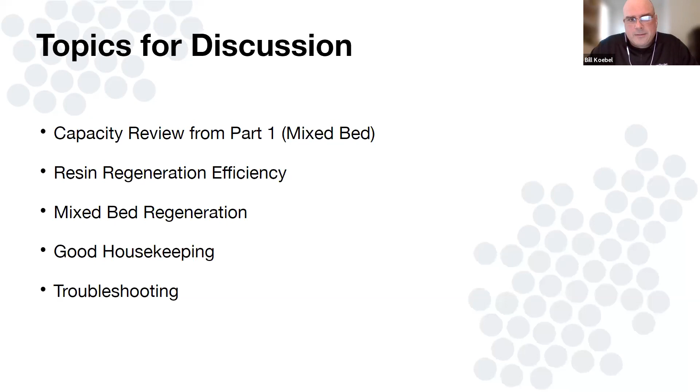So topics for today, we're going to kind of pick up where we left off in part 1. If you haven't seen part 1, I know that link is out there, or you can email us and we can send it to you so you can watch it. It's about an hour presentation and then an hour of question and answer, but I'm going to be picking off where we left off. We're going to dive right into regeneration efficiency. It's going to seem a little out of sequence, but I think it's good to talk about in the flow that I do. We'll get into the regen and then talk a little bit about good housekeeping and troubleshooting towards the end.

So today's resin topic, we're going to be focusing on the mix bed, which is, at least the ResinTech mix bed, a combination of that dark black cation resin, which is a strong acid cation resin, with our typical strong base anion resin. And again, strong, that is this light color, and that's where we get this salt and pepper in the end. We like the black cation resin because, as we'll discuss, it helps you see separation, so it makes regenerations I think a little bit easier. Also, our new plant in Camden, which is gearing up as we speak to make cation resin, is also going to be making this dark colored material. So black cation is kind of our thing, and it has a purpose.

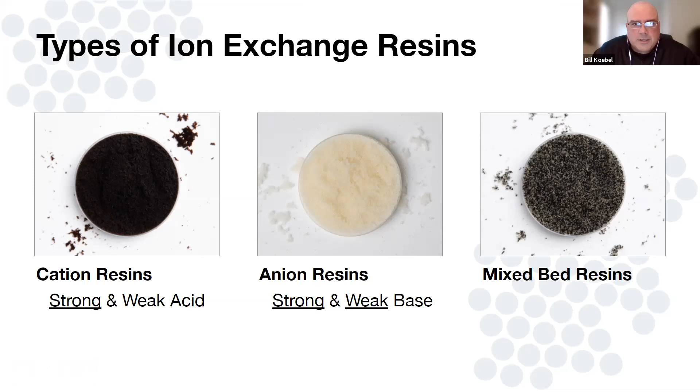All right, so let's pick up where we left off.

So if you guys didn't see the first one, this is going to seem foreign, but we talked a little bit about mixed bed exhaustion before. If you see my pointer here, typical mixed beds will rinse up to a high quality, and then slowly come down. Maybe not that slow, but you'll see a quality break where it'll eventually die out and have no capacity.

But when we talk about capacity of a mixed bed, knowing your endpoint is very important. So if we're going to take our tanks offline at a high quality, in this chart it says 16 megs, but it could be 18, then we're going to be limited to capacity ranges down here, and this is in grains on the x-axis. 5,000-6,000 maybe. And if you're cutting it off at, say, a mega ohm or 2, which is relatively low quality for a mixed bed, you're going to get much longer throughputs - kind of 8,000-9,000 grains.

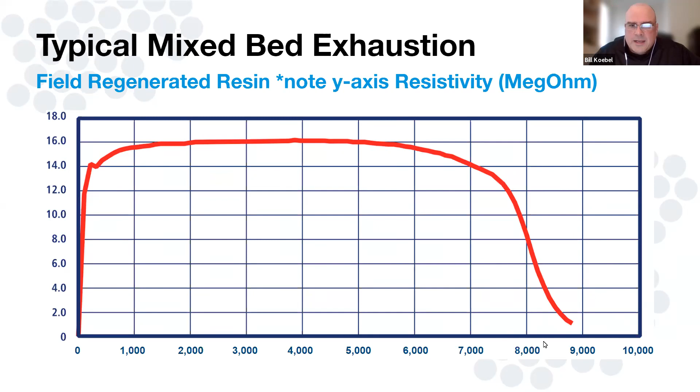But if you're going to cut it off at, say, 10 mega ohm or a relatively high quality, you're only going to get about half that. That's what I wanted to drive home first, is that where you end your mixed bed will dictate the throughput. So we can't apply a high capacity if you're going to be cutting it off at a very high quality throughput endpoint. Keep that in mind.

Then from the calculator, we also talked a lot last presentation about carbon dioxide. Carbon dioxide is present in all waters, at very low levels, but relative to TDS. But once you put it through an RO system, for example, those CO2 dissolved in water will pass right through the membrane. So even though your water quality, say your TDS out of an RO is maybe 1 ppm, the varying levels of CO2 are going to have a very dramatic impact on your throughputs. And it can vary - there's no set number.

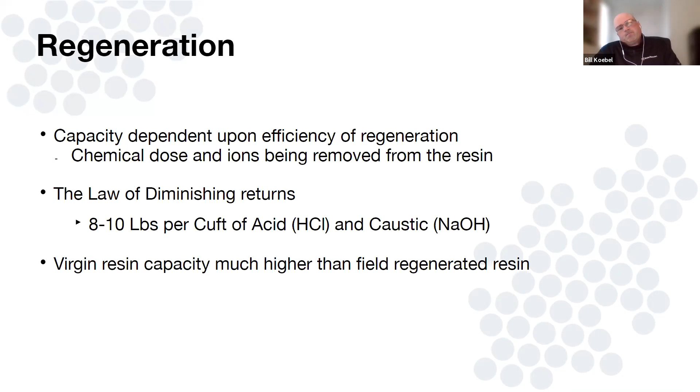When we talk about regen, the capacity will really come down to obviously how much chemical you throw at it, but it also matters what's on the resin itself. So it's not just how much, it's what's on it already. In our world of field regeneration, portable exchange DI, there is a law of diminishing returns, meaning how high of a dose can I go to get the best bang for my buck so that I'm maximizing as much capacity as I can from a cost perspective without going overboard and wasting money, but not using too little that I'm not getting the throughputs my customers are accustomed to, whether from my business or a competitor I'm trying to replace. So in the end, it's a balancing act.

Let's go through this. I'm going to throw a bunch of charts at you guys. They're all going to look the same. The y-axis is really discussing the percent conversion or percent regeneration, not really in grains numbers. We're going to look at this as, is it 60, 70, 80, 90% regenerated? The x-axis is always going to be in chemical pounds per cubic foot, and we're really going to be talking in this 8 to 10 pound range. This is kind of the wheelhouse, as I call it, of efficiency in terms of field regeneration, where you're giving it a good enough kick that you're getting the best regeneration you really can, versus too low where we're on the downside of some of these curves, where for an extra pound you can get a lot more. This range is kind of where it levels off.

The tricky part about sulfuric is that calcium sulfate is very insoluble. It only takes a couple thousand ppm for it to precipitate out of solution, and that can happen in and around the resin bead itself. So if you have hardness bearing water and you're using DI resin that is removing it, and you go to regenerate it, and if you happen to overdose the sulfuric acid too soon, you basically foul the cation resin with calcium sulfate. If you've ever dealt with it, it's not something easily fixed. You can't just rinse it out. You can't just soak it in hydrochloric acid and it goes away. For all intents and purposes, that resin is done and you're just going to move on from it, meaning throw it away and replace it.

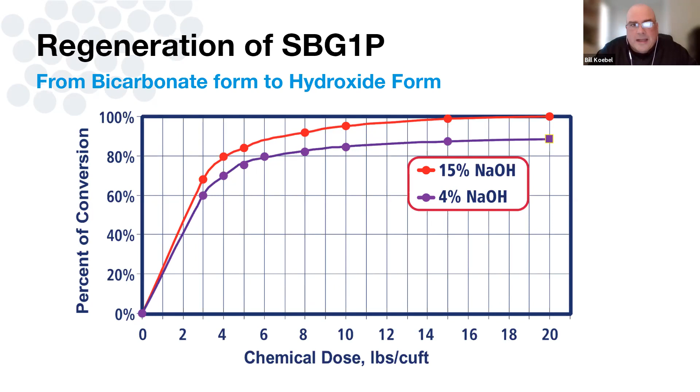The typical regen we see from a field resin is roughly in that 60 to 70% range. A lot of times that has to do with whether they're using brine to separate or not, which I'll talk about a little later. But that is normal—if you see 60%, 65% conversion of your anion resin, that's normal. And that's because of this combination of anions that can be on the resin itself. Again, if we're using brine to separate, you're going to be putting a lot of chlorides on it.

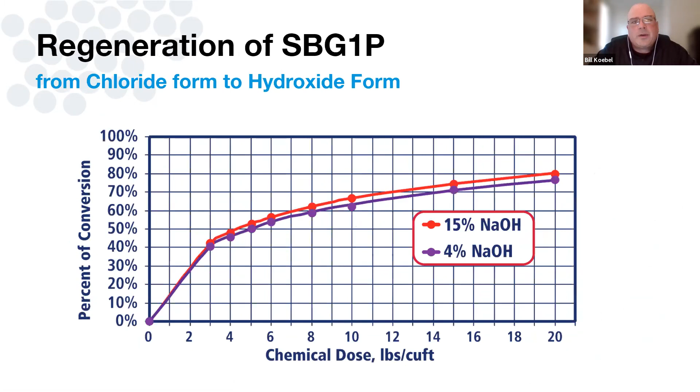That's the reason behind it. So as we talked about, the resin capacity, what you recover, is really a function of what was left on it. In terms of what we're concerned about in the field coming off the resin, as we talked about last time, sodium leakage is our primary concern when it comes to cation resin.

If you're having sodium leakage problems or poor rinse up issues, a lot of times it can be traced back to the sodium leakage. So that's an indicator something went wrong in the regen, or something was in there that shouldn't have been.

On the anion side, and I'm not really harping on it too much today, but silica is the first thing that usually leaks off an anion resin. Things like sulfate and chloride don't really leak off. They're not really going to cause you poor quality issues, it's more of a capacity problem. But you get into the lower held anions, and silica is the first guy to come off.

So if your customer has a silica spec, you can still be making water quality, but you could still have silica coming through. The next ion that tends to come off is really the bicarbonate, but kind of has CO2 to a degree. That can leak off, but that's usually right at an endpoint of the other things pushing it off. The first thing you're really going to notice is silica.

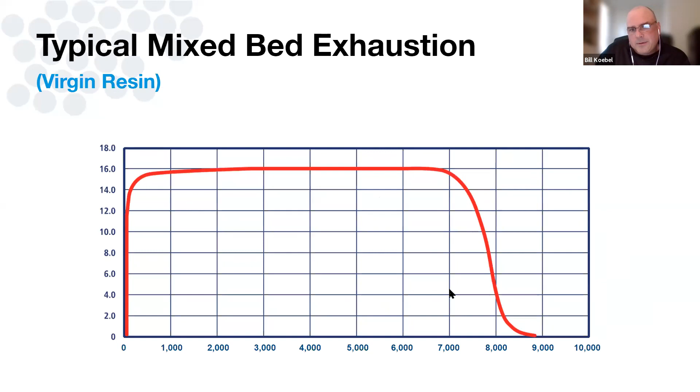As we talked about earlier, field regeneration is not like that. You'll rinse up maybe a little bit slower, but then once it starts coming down, it takes a little bit longer. There's a lot of capacity there that you gain with virgin that you kind of lose with regenerated. So if you have a finicky customer that wants to hold the highest water quality for the highest period of time, if they're not happy with what your regenerated resin does, or what you can do with tanks in series, virgin resin tends to solve that problem.

Crashing a lot of times comes from something that went wrong in the regeneration process, whether it be poor separation, poor regens, or maybe something happened in the mix.

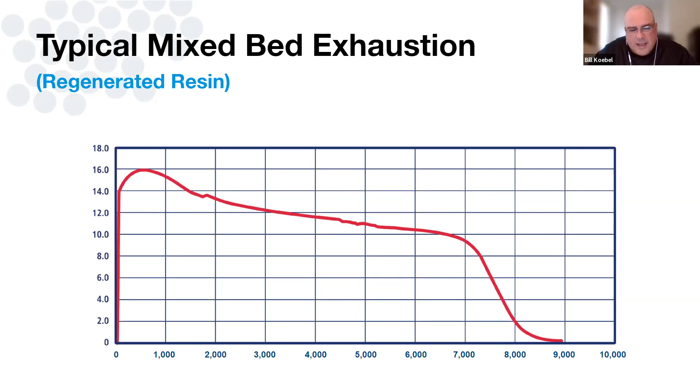As we get into the mixed bed regen portion here, every single step has a purpose. As much science as there is behind all of this, there is some art that has to be taken into account. Not every batch of mixed bed is going to behave the same way, or do exactly what you want.

That makes it challenging, I think, in a portable exchange service DI environment, because really your end goal is to make a consistent product. You want to make the best water quality for as long a period of time as you can for your customer. But you've got to make your process as easy as possible to repeat over and over again. And I think that really all starts with paying attention to the details.

I'm hoping to go over some of those details today that maybe some of us have forgotten over time, or maybe aren't implementing today—just some simple things that might help you improve your product. At the end of the day, this is your product you're putting into the field. Let's see if we can help improve it or solve some problems for you.

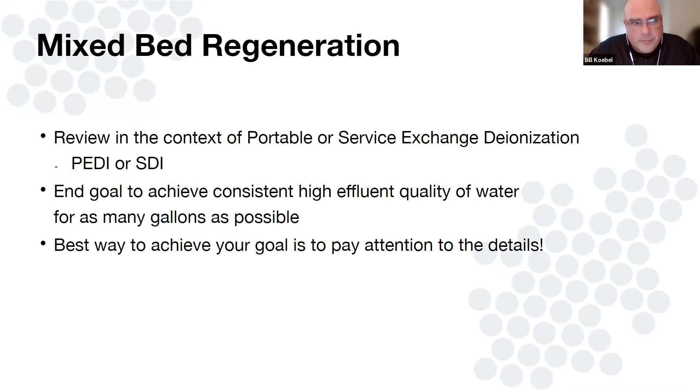So here is our typical regeneration setup. This is a classic Ecodyne style regen plant. Whether you have an Ecodyne plant or one that was custom built, they're all going to look pretty similar here. You have a separator column, usually very tall, to separate the resins from one another. Then regen vessels, one for cation, one for anion.

I don't know if you can see this, but the anion vessel is here—it's a little bit bigger than the cation vessel. Sometimes you might have multiple regenerators, maybe four tanks, for staging or doing different regenerations at different times. And then in the end, there's always a mixer.

Now there are smaller plants, what we call funnel plants, and I didn't quite have a good picture of that, so I didn't include it here. But a funnel plant is basically a single tank separator that you then regenerate inside the service exchange vessels on your own, and then put the resin back into the funnel to mix.

So it's basically the same process here, just not broken up into big tanks. So even if you don't have a plant like this, and you just have a funnel plant, everything we're about to talk about is going to apply—it just applies a little bit differently because of your system.

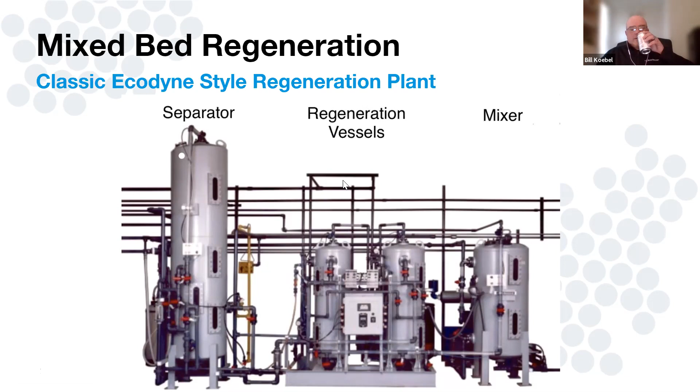In terms of regenerating mixed bed, the sequence really isn't any different than what you would do for a water softener, for example, or anything in-place regenerable in the field. You still need to backwash, and in the case of a mixed bed, the purpose of the backwash is also separation.

You're going to be adding chemical, then rinsing it out with a slow and a fast rinse. And then in the case of mixed bed, we've got to remix it into the vessels and put it into service. So the sequence isn't anything really different than what you would do for any other unit.

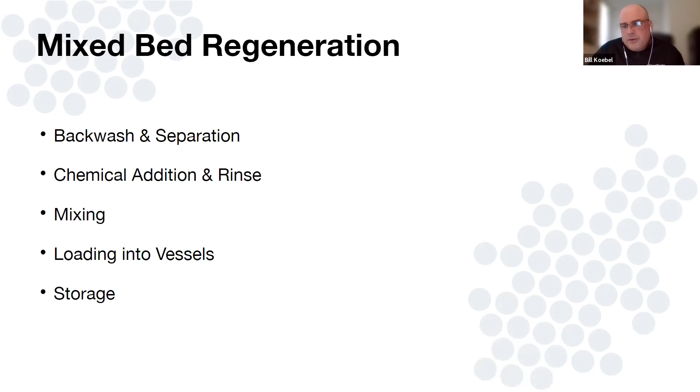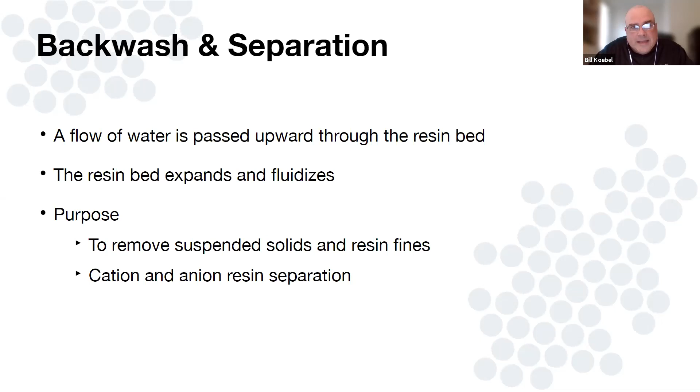So backwash, basically lifting the resin up—the purpose of it is to remove any suspended solids, any resin fines that might be in the vessels, but also we've got to get that cation and anion resin to separate.

So in a perfect, ideal resin separation world, the cation resin, which is the dark resin, always goes to the bottom, and the anion resin sits on top. In a perfect world, you can see a perfect line every single time.

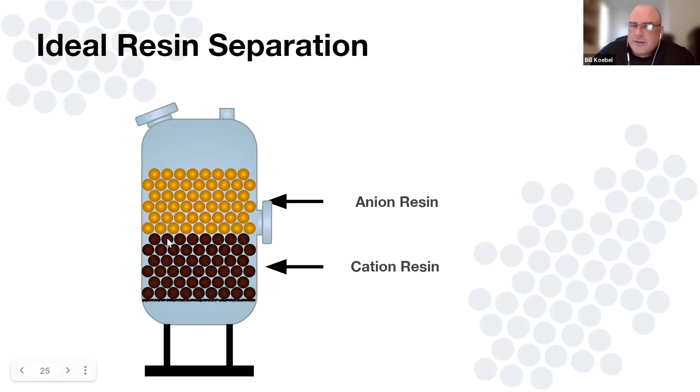Well, it doesn't always work like that, right? A lot of times there is what we call an interface or an intermix layer that can occur. And this just happens because beads stick together.

There's a reason why you get an intermix layer. Cation resin is denser, so it wants to fall. Anion resin is lighter, and it wants to go to the top from a density perspective.

The resins in mixed beds today are really designed to separate, but sometimes we get this stuck-in-the-middle situation. We've got to try to break that up and get it as separated as we can. Ideally we want this layer never to be more than, call it, 3 to 6 inches. If you're getting into like a foot of intermix layer, we want to try to make it smaller and smaller, because that's where it throws off the balance of your regeneration.

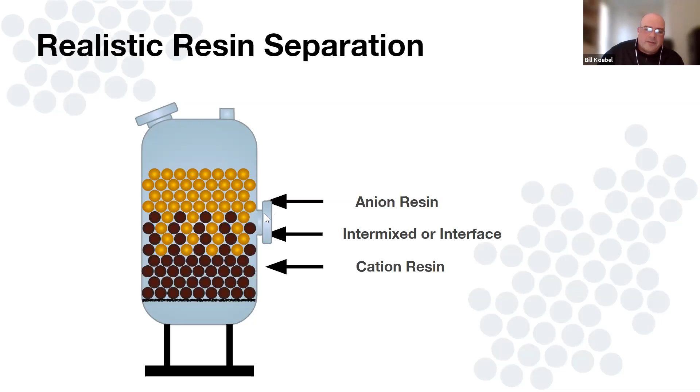In terms of what can hurt us when we try to separate, we're looking at a few things. The first thing is your separator is designed for a certain volume of resin, meaning it's designed for 20 cubic feet, you want to put 20 cubic feet in there. It's really designed for 100% expansion. If we try to jam twice as much resin into a column designed for say 20 cubic feet, you're only going to get it so far. So you tend to leave a larger intermix or you don't get as good of a separation. So really the first thing you need to do is don't overload your separator.

Keep it consistent. Resins themselves like to stick to one another. In fact, the cleaner the resin, the more it likes to stick to one another. This has to do a lot of times with a couple of things. One, when the resins are still in their hydrogen and hydroxide form, they create a lot of static charge, and those static charges are opposite given the opposite resins. So this tends to make the resin stick together in your separator.

So how do we manage that? If your resin is still in the hydrogen hydroxide form coming back from your client, the easiest thing to do is get rid of that capacity. A simple thing you could do is hook it up to your own water supply or an RO system and feed your DI water storage tank, use it as makeup water. Another thing you can do is kill it, which we'll talk about, brine kill, here at the end. But getting it out of those forms is very important.

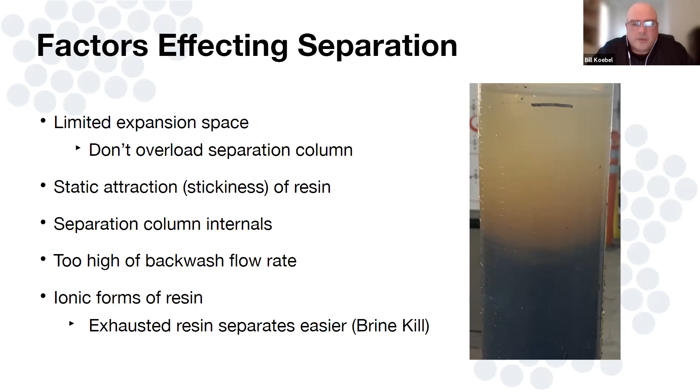But if you have a high level of hydroxide or hydrogen left on the resin, that can actually work against you a little bit, and you can damage the resin over time. That's not uncommon. So in terms of how we apply the brine kill, I think every plant is unique and different. I think it's always better to introduce a low concentration for a longer period of time, because that helps preserve your resin from breaking up or even potentially cracking, decreasing the overall life of your float.

The whole point of the brine kill is to get rid of that hydrogen and hydroxide form. Really, in the end, what you're doing is increasing the density difference between the two resins, making the cation resin pretty much as dense as you can get it. The anion resin is much lighter in terms of density, and it will want to separate, coupling that with the particle sizes themselves. That's really the point, to get the cation resin as dense as possible.

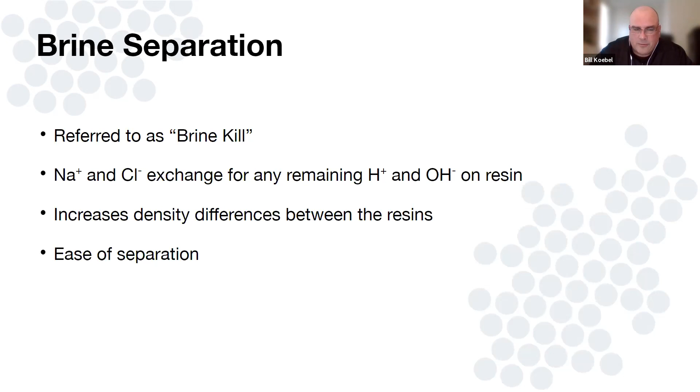So as you talked about, there are some drawbacks. When you introduce too much brine too fast, you can fracture those resin beads due to osmotic shock. These resins shrink and swell when you change the form, and I'm sure you guys have seen this. Cation resin, not so much, but you see it a lot in the anion resin.

If you were to take a pure chloride form anion resin and do your typical field regeneration to it, you're going to see a swell of that resin from 10 to 15%, usually, on average. On the virgin side, when we make it in our plant, it swells closer to 20%. That goes back to how well we can get it regenerated and the regeneration levels we achieve. We're pushing 90, 95%, if not more. Typical field regeneration is roughly 60 to 70%, and that's why it doesn't swell back as much.

Anion resins are definitely more fragile than cations. If you're introducing brine too quick and you shrink that bead really quickly, that can actually shatter it. Now a bead that's cracked or shattered still works, it's still a bead. The problem is what happens the next go around or two. A shattered, cracked bead then starts breaking apart and you get some resin fines.

So what we see a lot, mostly in the field with plants that use brine kill, which is most of them and I do encourage it, I think it makes your process more efficient, you will see quite a bit of anion resin loss over time. So it's always good to have some anion resin handy, whether it's a drum, chloride form, just so you can top off and keep your balance in your plant where you need it every time. You definitely don't want to put less anion resin in your mix beds because, as we talked about with the CO2 and the silica, the anion resin is always your limiting factor in most cases, if not all of them, when it comes to mix bed.

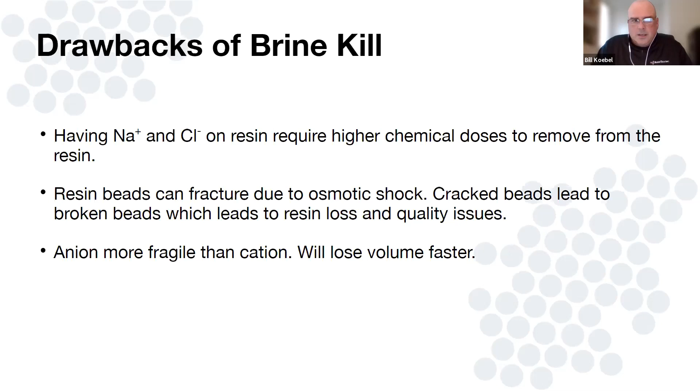So putting in a half a cubic foot every once in a while is probably what is necessary - and I need to put that in context - but being able to top off your float every once in a while, that's the other reason. So anion resin tends to be the most fragile. You're going to lose that first the most, and then making up extra due to just the swell loss is important.

Here's some pictures. This is a good picture of just good old virgin resin, good whole beads, good mixture of the two. These aren't really mixed beds, but this kind of proves my point. This is what physically broken resin looks like. Over time, some of these cracked beads just start falling apart and becoming these broken shards that eventually backwash out.

Sometimes they cause cross-contamination, and this is kind of what we want to avoid. But I will say most service exchange DI floats we've seen in analysis usually have a good 20 to 30% cracked beads. Again, that's not bad - it's the broken ones we're always looking for. As long as there's a low amount of broken beads, you're okay.

That's normal, right? And then here's a picture of oxidized resin. It still kind of looks like beads, but these are very soft. If you were to pick up an oxidized resin bead in your fingers, you can rub it and it disappears. That's typically what oxidized resin is - it kind of pastes in your fingers itself. We don't see this too much in service DI, but it can happen if you've got a high chlorinated water supply constantly bombarding the DI resins. They can oxidize over time.

So if you are doing a lot of tap water or city water service exchange, it's always good to protect your mix beds with activated carbon. When you think about what the service exchange DI world is, this resin is your product, your asset - this is what's making you money. Every time you buy a cubic foot, your goal is for that to make you thousands upon thousands of dollars in regeneration over time. Well, if you're not protecting it, you're just going to constantly be replenishing that investment. Obviously you want to make that last as long as possible, so it's always good to protect it.

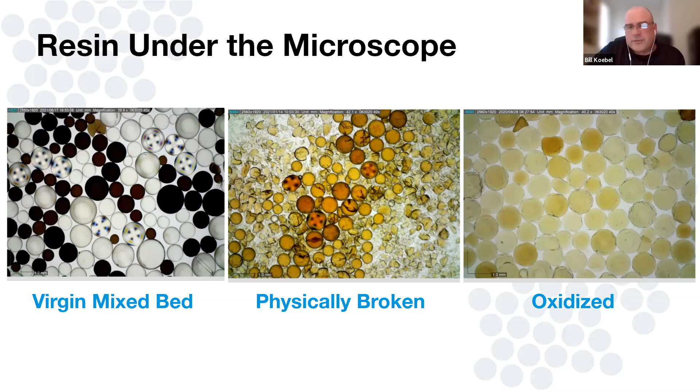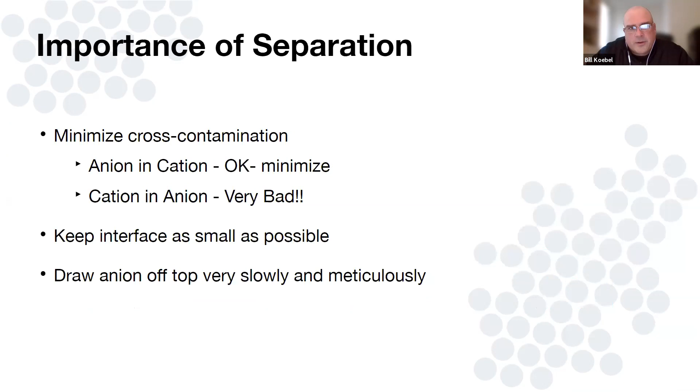All right, so separation - every step of the way is critically important. But if we don't get the separation right, everything you do down the road is not going to be good. So the first and most important thing we have to do is minimize cross-contamination. That goes back to the intermix layer, to properly getting it to float up without the two mixing with one another. In the end, what we're really trying to avoid is cation resin in the anion resin, and that's not good at all. Anion in your cation is okay, but we really want to avoid cation in the anion.

So if we do that, we keep our interface as small as possible. And then when it comes to drawing the resins apart, because you can't regenerate them in a separation column, you have to put it into those separate regen vessels. It's best to always draw the anion off the top, and you want to do it slowly and meticulously. So typical separation, we have our good anion on the top, cation on the bottom, and then we have the intermix layer.

If we're drawing off the resin right at the intermix, whenever you do this draw off point, you're always getting kind of this funneling effect or vortex. So it's always going to pull some from the top, some from the bottom, and some from the middle. Well, if you're pulling the resin right off at the interface, all this cation resin is going to be in with your anion resin.

To help avoid this, you want to move it up. Your takeoff point should be high, up in the anion resin. You should introduce a slow backwash to lift the bed up to your takeoff point. A lot of times these takeoffs are literally just pipes with an elbow and a piece of pipe sticking up, kind of an L-shaped piece of pipe. It's okay to have it high because you can always backwash up to get the resin to fall in. Then as that interface rises up close near the top of that pipe, you slow the backwash down. And in most separator columns, you're going to leave resin inside the column.

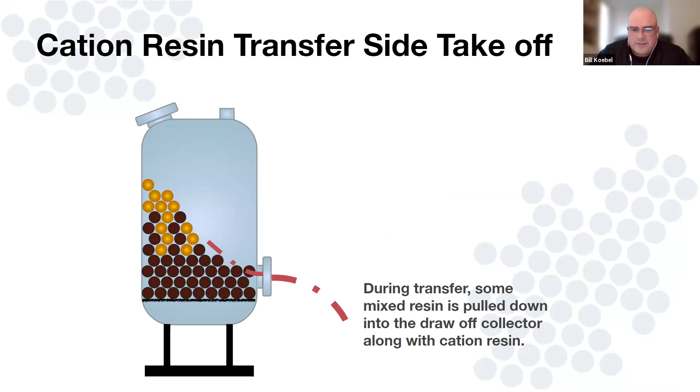But once you've done your anion takeoff, you've gotten that clean, and you would go to draw the cation off the bottom. Again, at that point, it's okay to pull a little anion resin with it. It's not ideal, obviously, because it's just loss of capacity there, but it's not the end of the world if you have to draw it all off at the bottom. The key point I want to make here is keep that anion transfer as pure as possible so that we don't get cation resin in with the anion resin.

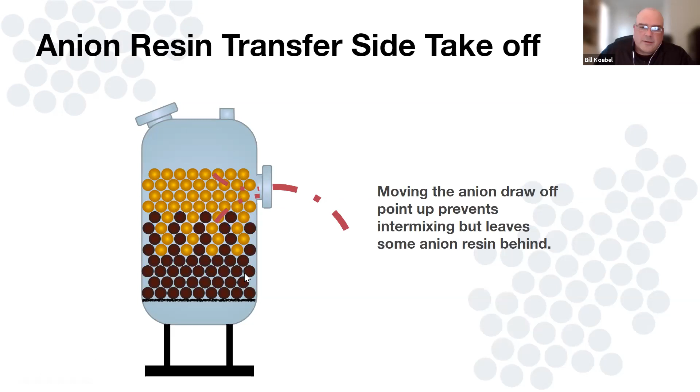Well, why do we care? Think about what you're regenerating the resins with. Anion resins are regenerated with sodium hydroxide. If you have cation resin mixed with that anion, you're regenerating it with a sodium form chemistry. Any cation resin that's in with your anion will be put into the sodium form. And then obviously you're going to go mix it with your resin, everything at the end. You've just introduced excess sodium into your mix bed.

And this can cause the mix beds to crash. It can cause poor water quality. It can cause short throughputs. So it's very important to try to minimize as much cation in your anion as possible, and that's the reason why. Conversely, having anion in your cation is not the end of the world. If we're using hydrochloric acid, any anion that's in with that cation is just put into the chloride form. Chloride doesn't really leak off, doesn't really cause quality issues. What it does is just you have some loss of capacity because that anion resin isn't in a hydroxide form. So at the end of the day, it's not the end of the world.

Plus, when we talk about the limiting factors of a mixed bed, it's always the anion. So what ends up happening is there's always plenty of cation capacity left over. If you happen to have a bunch of anion mixed in with it, you're really not losing much because you still have plenty of leftover cation resin to begin with in the hydrogen form.

So to sum it all up: minimize cross-contamination during transfer. Be very meticulous on your backwashing. Make sure you get good separation. If you're using brine separation, make sure you get what you want in terms of that interface. And as you're transferring the resin over, a little slow backwash always helps. Lifting up to your transfer point versus trying to work around an interface is always good. If you are having troubles or things look out of whack, just stop. Re-level the beds, stop the transfer, and restart again. Because if you don't get this portion right, everything you do down the line really isn't going to matter much at all.

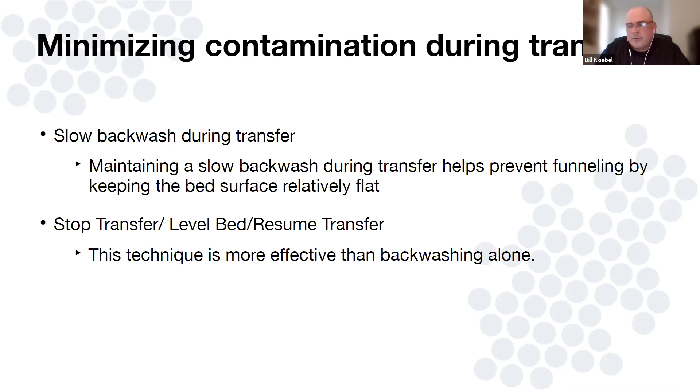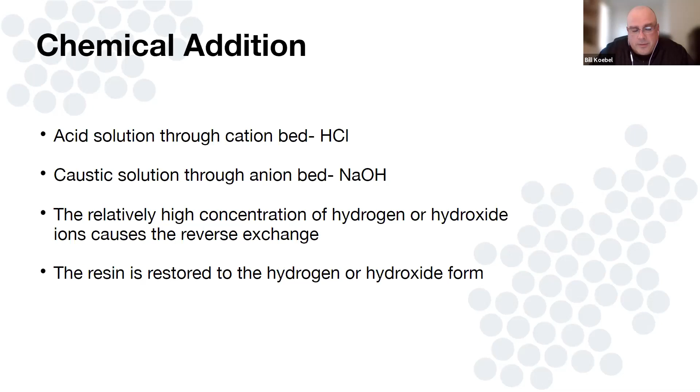All right, chemical addition. I'm not going to go crazy into this, we kind of went all over that at the beginning here. But obviously you're regenerating with acid on the cation, sodium hydroxide on the anion side. You apply your chemical doses, make sure you got the right concentrations for the right amount of time, and do all the things necessary to get that proper dose.

When we talk about dose, it's really a combination of three things. It's not just the chemical concentration, it's not just the amount of chemical, it's also the flow rate in which we apply it, and all that over a period of time. That's what really equals your dose.

Typical flow rate for regeneration of DI resins is anywhere from 0.5 to 1 gallon a minute per cubic foot. When it comes to chemical dosing, we're using a roughly 10% hydrochloric acid solution. That usually equates to approximately a 20-ish to 30-minute chemical regen time.

Anion is longer. You're only using 4% sodium hydroxide, and we do want to expose that anion resin to as much hydroxide at that concentration for as long as possible. That usually takes 45 minutes to an hour, and sometimes the longer the better. So it's okay, they don't need to be the same time. If you are regenerating your anion resin and it's only taking 20 or 30 minutes, the odds are your concentration might be too high, and you're actually better off backing down your concentration and doing it for a longer period of time.

All of this is what controls, in the end, your capacity and your leakage. And it's always important to make sure all parameters are met. So if something feels out of whack, this is usually, assuming separations are good, the next phase: are your parameters met? Are you meeting the flow rate and time with your chemical concentration to achieve that proper dose level?

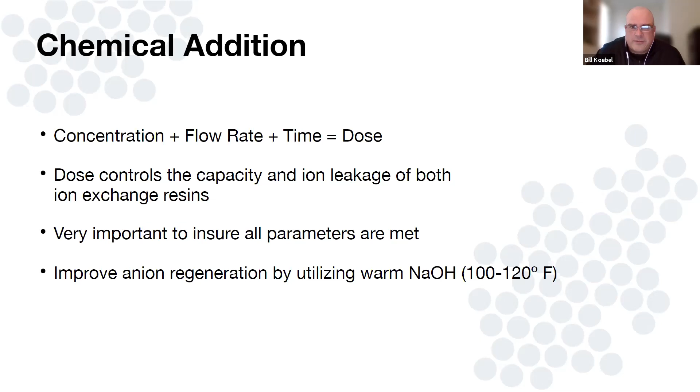And then on the anion side, rinsing — the silica reduction is always improved by using warm sodium hydroxide in that 100 to 120 degree Fahrenheit range. It certainly helps with normal regens, but it's a marginal difference. You really only want to use the heat when you're looking at silica.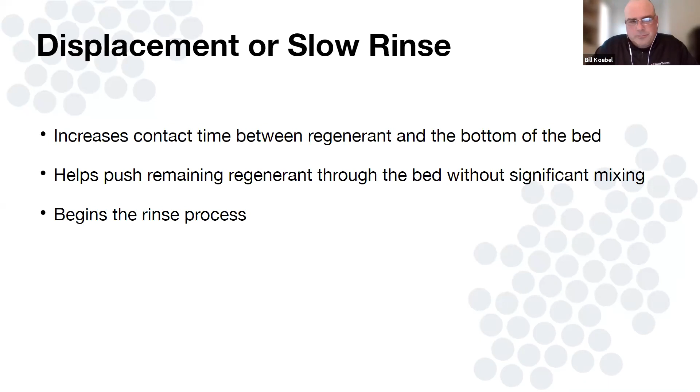Just like any other ion exchange, there is a displacement and a slow rinse. The whole purpose of this is just to move that tank full of acid or caustic through. You've regenerated this for 20 minutes, now you have a tank full of chemical, and that chemical still has value and can do a lot of work for you. So slow rinse is important — don't skip that. We want to push that slug of chemistry through the bed and get as much dose out of it as we can. Then, when we're done, we can begin the fast rinse process.

The whole point of the fast rinse process is just to rinse the chemical out. Hot water will help that cause for sure, but we certainly don't want to leave any acid or caustic inside the resin beds, because you're about to mix them back up again. If we leave a lot of sodium hydroxide in the anion resin, as soon as we go to mix that up, that's all going onto the cation resin. And conversely, hydrochloric acid left in the cation that gets mixed with the anion resin — all that chloride is going to start consuming your hydroxide sites on your anion. So it's very important to rinse these down.

Now, typically at this stage of the game, backwash is typically, you can use soft water. Heck, I've seen people use tap water with hardness in it. It's fine. But once you get to a point where you're introducing the chemicals, you really want to be using deionized water, because at this point you're trying to get all of the chemistry you want on the resin, hydrogen hydroxide. Using deionized water helps preserve those capacities. If you're using tap water or soft water, you certainly can, but any gallons you use to rinse is just going to consume the capacity of the resin.

And then specifically on the anion side, you cannot use hard water at all. It has to be at least soft, or at least the cations removed, because the calcium that's in that water is going to foul your anion resin. You are going to get calcium carbonate precipitation. It's unavoidable, it happens immediately. So I can't stress enough that all the waters you use for regeneration, from the point of introducing chemical to rinsing, really should be a DI-RO water source to help preserve not only the capacity, but also the resin itself.

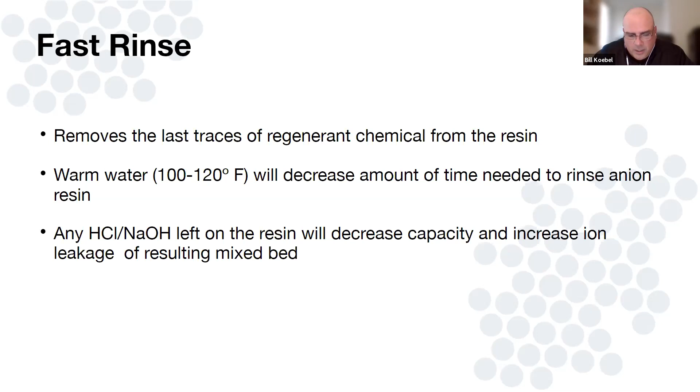If you didn't get a good reading, or you didn't read it, and all of a sudden you sent 3,000 microsiemen water to those resin beds, it's no longer 0.5%, it could be 10%, it could be 5%. It could have negative effect. So if you are going to go that route, we definitely want to make sure that all the ducks are in a row in terms of where your quality's at.

Talked about this last time too. Let's talk about floats.

Resins that treat RO water primarily, and resins that treat tap water primarily, are different animals when it comes to resin quality. RO water is very clean, or even pre-treatment from another DI system, so these resins stay very clean. A lot of times the only thing that really accumulates on an RO resin is things like sodium, chloride, and CO2. With tap water, you get the whole gamut of water chemistry, from hardness to sulfates.

But the other thing you get quite a bit with tap water is TOC, and TOC can also impact resin quality. These organics hit the anion resin - they're big organic acids, and acids are anionic in nature in terms of their group. If they park themselves on an anion resin, and you go to regenerate with sodium hydroxide, all those little weak acid sites hanging on the ends around that organic acid stuck on the resin will be put into the sodium form.

Well, you go to rinse up your final mixed bed, and guess what? Your quality decreased, because at that point all those little sodium groups hanging off that organic are now putting that sodium back into the final water.

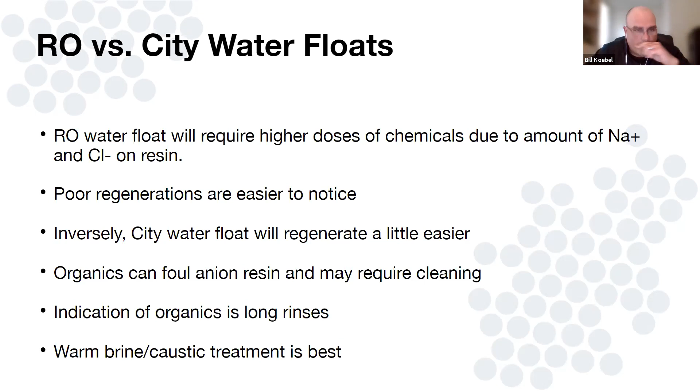So that's kind of my comment on float management there. All right, so now we're talking about mixing - mixing the resins together.

In an ideal world, dry mixing theoretically is the best - it's the most intimate mix, but it's also labor intensive. When I talk about dry mixing, I mean literally storing the components in a drum, then using a cement mixer, bucking in the resin, letting the cement mixer roll to get a nice mix, and then dumping it back into a drum to load into a tank. Obviously that takes a lot of time and effort. We do it quite a bit at ResinTech, actually, as part of some of the products we make.

And it is the best theoretically, but when it comes to practicality, wet mixing is more than fine, and really what most of us do, including ResinTech, when we make our virgin products, because we can do a large volume very quickly. Really the key when it comes to wet mixing is we want to keep the resins together - we don't want to risk them separating. There's a couple ways you can do that in your mixing column.

First, you want to keep the water level at the top of the resin bed, not too much above. A little bit's okay, but not a lot. Ideally, you want to keep it at or below the resin bed.

As you're air mixing and getting that tank rumbling, that's a good way to know if your air mix is going well. Is the tank shaking? If it is, you're doing fine. If the tank's not shaking, you may not have enough air going in there. But if the tank is moving, you're getting good rumbling and a really good mix. Usually that only takes maybe 10 or 15 minutes.

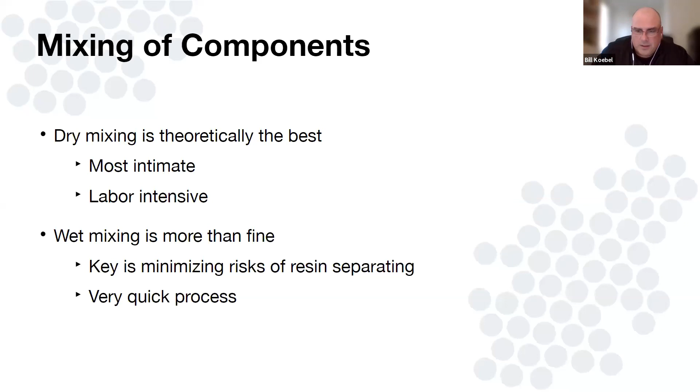And then speaking of loading, same thing. Dry loading is always the best because there's no water. If you have no water involved, there's nothing to worry about, right? There's no separation. But wet loading is more than adequate. Wet loading is the preferred method because it's faster. The biggest thing we need to do is make sure we get the water out of the tank.

I don't care if you're loading a jumbo, I don't care if you're loading 8/18s, the little guys, or just the typical 2 to 3 cubic foot vessels. The main thing to do is make sure the water's getting out of the tank as you're loading the resin into it. Because again, these resins want to separate. They're designed to. So the only thing that's going to get them to separate is if they have room with water to come apart.

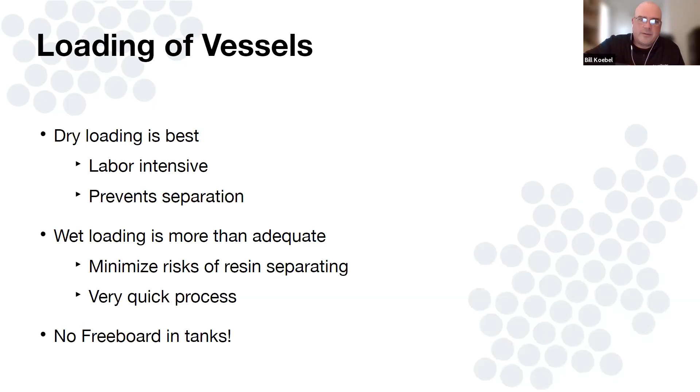So either you hook up a vacuum on the suction—think of a typical 1447, you have your inlet, your outlet, your fill port. Well, that outlet has that riser tube to the bottom. If you were to hook up some sort of vacuum to that and suck the water out as it's coming in from the fill port to load it up, well, every bead of resin that gets in there really won't have a chance to separate because there's just no water present.

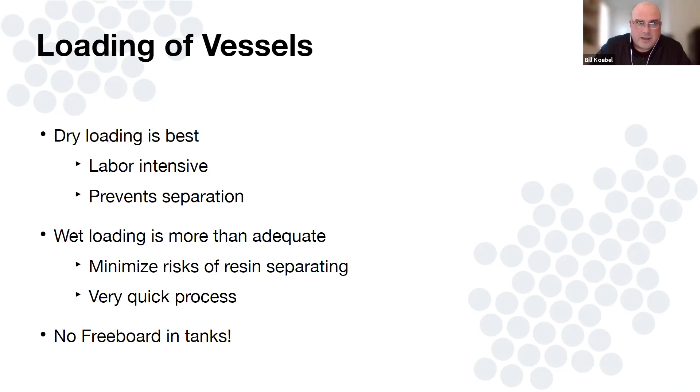So that's loading. I'm running out of time. Storing resin—the biggest thing I want to highlight here is carbon dioxide intrusion. CO2, just like in the water, can occupy exchange capacity on the resin, and it can also come from the air. There's roughly 400 parts per million of carbon dioxide in the air itself. If you leave an anion resin exposed to the atmosphere, that CO2 is going to slowly dissolve into the resin or slowly exchange onto the resin, for lack of a better term. And you can lose 1% of your resin in 24 hours.

And when I say that, I'm talking about you leave it open, like you leave a drum open in the back of the shop. Well, that top one inch in a day is going to be gone—completely exhausted. So you want to keep your resin stored, ideally wet, underwater, and sealed in either a drum or your tank.

Now, it's easier said than done. A lot of times you're preparing them to be sent out into the field. It's okay if you put the water out of the tank, just make sure they're sealed up, make sure they're closed, make sure as much air as possible doesn't get in there, because you don't want to see the CO2 destroy the resin.

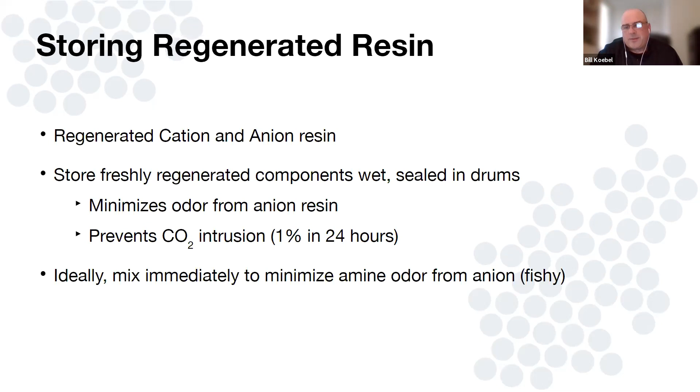And if you are managing components versus mixes at the end, ideally you want to mix them immediately, but if you guys have smelled the anion resin, it smells like dead fish. Keep that sucker closed up underwater as much as possible to minimize as much odor as possible getting into the air, because those amines are pretty offensive. They're not dangerous, they're just offensive.

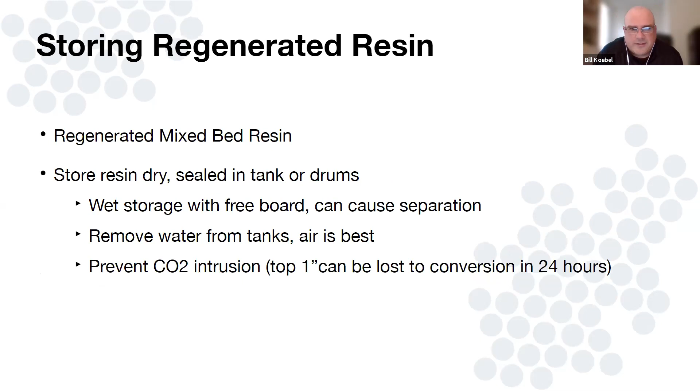Kind of already covered this, and getting to the troubleshooting - I'm not going to go crazy into this - but assuming everything went well with your regeneration, and you're having trouble in the field, the question is: is your equipment a problem? Is there a distributor broken in the tank? Is how they're monitoring or hooking things up broken? Do you have a leaky valve?

How many times have we seen that? Like, oh, the tank lasted 3 days, it usually lasts a month. Well, the city water valve, the tap water valve, was open to the RO storage tank, etc. Things like that. Did the operator plug the tanks, hook up the tanks backwards, etc. So was it an equipment issue? Was it human error? Next item is water chemistry.

That's probably by far the most that we see. Is something changed? The RO is not working as efficiently as once before. Municipal supplies change sources all the time, especially in different times of the year when the water demands change. Did they go to a well source versus the reservoir from the surface source? Well, those TDSs can be very different, etc.

The media itself - is there the right amount of resin in the tank? Did we lose resin? Again, back to regeneration. The condition of the resin - is it oxidized? Is it getting fouled? Is it just old? Resin floats can get old just like anything else. If you're not adding resin and taking resin out on a consistent basis, that resin's just going to degrade. So if you're in a situation where you're not introducing new resin to your float, you can see the resin age take its toll on your service exchange.

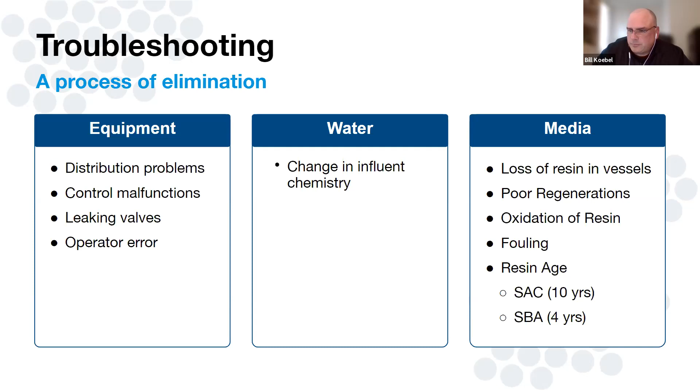Housekeeping - at the end of the day, just keep everything stored properly. Keep your floors clean, because resin on the floor can act like little ball bearings if you ever slipped on them. Keeping your floats separate, if you can, I think helps make your consistent results in the field based on your expectations for your customer. And then take your time. The regeneration process is the key to your product. So if something is amiss or something is off, it's going to keep showing its ugly head down the road for you. So paying attention to those details, I think, is very important.

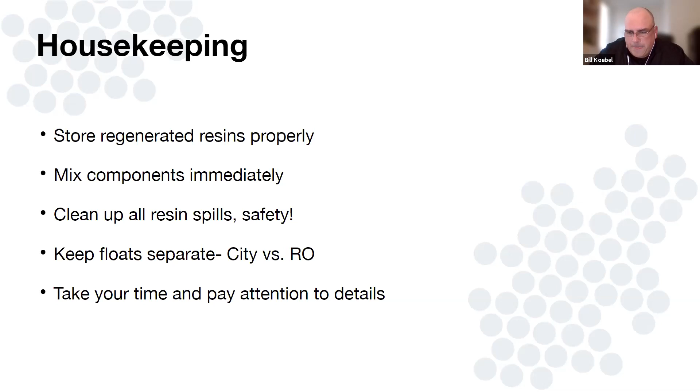All right, that's that.

An hour and, all right, 3 minutes, Bill. Sorry, I was trying to get it under an hour. No, that's okay, you did great. I'm sure everybody appreciates it. It looks like most people are hanging in there.

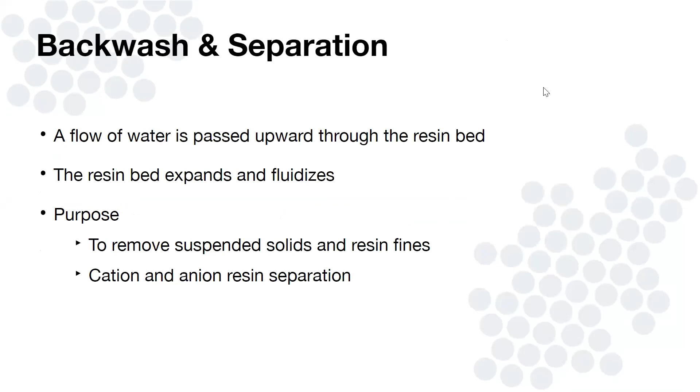So from earlier in the webinar, when you were showing the curves of the sodium and calcium efficiencies, we got a question: I thought that calcium was more readily removed than sodium because of selectivity, so I don't normally remove hardness prior to DI. Is that not correct?

Repeat the second part, Caitlin. So due to selectivity, Eric thought that calcium is more readily removed than sodium - during regeneration? During regeneration. No, it's actually the opposite. Sodium is relatively easy to get off during regeneration. The problem is if you leave too much behind, it's the first thing that leaks off on the subsequent service run. Conversely, hardness doesn't really leak off DI resin - it'll hang on there. You're not really going to see a hardness leakage during service, but it is a little bit tougher to get off the resin.

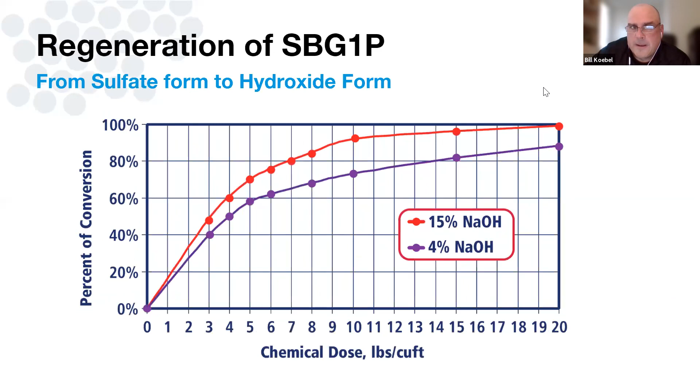And this is kind of counterintuitive to me. I think that's where he's coming from too - I was always taught, and I'm sure you were too, Caitlin, that selectivity reversal, the divalent versus monovalent, is a lot more efficient, right? We see that here when we talk about sulfate on the anion side. So I wish Peter was around to ask, but I don't really understand why it's counterintuitive when it comes to calcium - you'd think selectivity reversal would be better, but it isn't. It's just that calcium is harder to get off than sodium is. I'm not sure, I'll ask Peter.

I've had that question a lot too, where people ask, hey, should I soften before my DI bed? From a resin capacity, in that moment-in-time service perspective, there's no difference. The resin is exchanging ions - it's taking out equivalents of whether it's sodium, calcium, magnesium, or whatever else cationic that might be in the water.

But when it comes to regen, that's where it can be an advantage if you wanted it to be. If you're not using brine to separate, and you're taking out the hardness before your DI beds, well guess what - your resin's in the sodium form, you'll get more efficient regeneration in theory. But if you're using brine to separate your mixed bed, you're converting a lot of this calcium form over to the sodium form. So you kind of do yourself a favor when you do that.

But that's kind of minutia stuff. If we step back in terms of mixed bed capacity and talk about what the limiting factors are for these kind of numbers, it's always the anion resin. When we talk about the mix of cation, a typical mixed bed is 40% cation, 60% anion by volume. The idea is you're going to have one-to-one sites - for every one cation site, there's an anion.

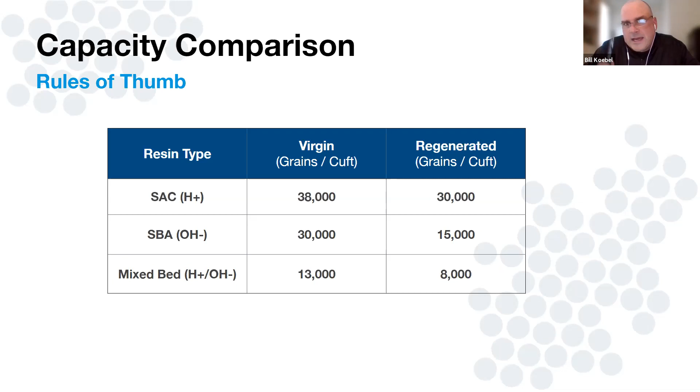Well, if we're in the scenario where you have an RO feed, and you only got 1 ppm of TDS - which is really the cations and anions - and now we're tossing in 5-10 ppm of CO2, well those are all going to occupy anion sites. There's no cation to balance that. So in the end, all these mixed beds are heavily cation, really cation heavy, and you always have excess cation.

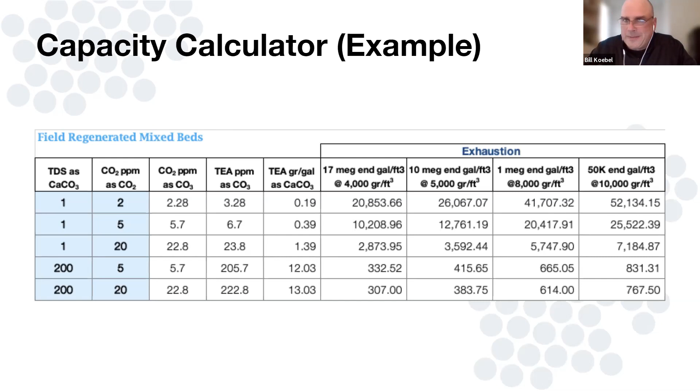If you ever really watch a typical mixed bed exhaust, what's the pH coming out of it in the end? What do we normally see? Well, it's usually a really low pH. And that's because the anion is completely exhausted and there's plenty of cation capacity left over spitting out hydrogen. So that's the case no matter whether the resin was in the calcium or the sodium form to begin with when you regenerated it - you're always going to have this excess left over.

So we're kind of splitting hairs a little bit there too. I don't want everybody to run out like, oh, I've got to put a water softener in front of my DI beds. My answer is don't, because your anion capacity is your limiting factor, not your cation. So whether you got a less efficient regen on the cation side due to calcium form versus sodium form, it's really not going to be the end of the world.

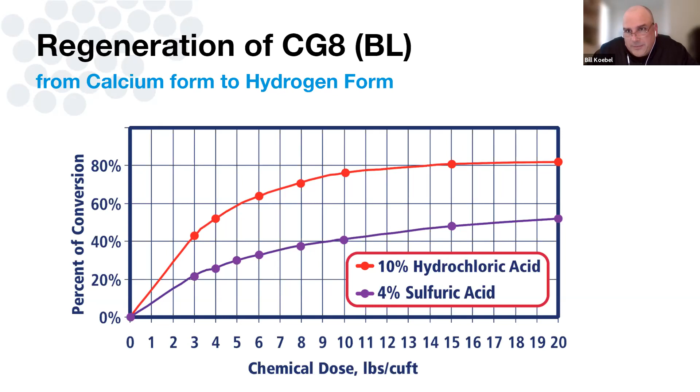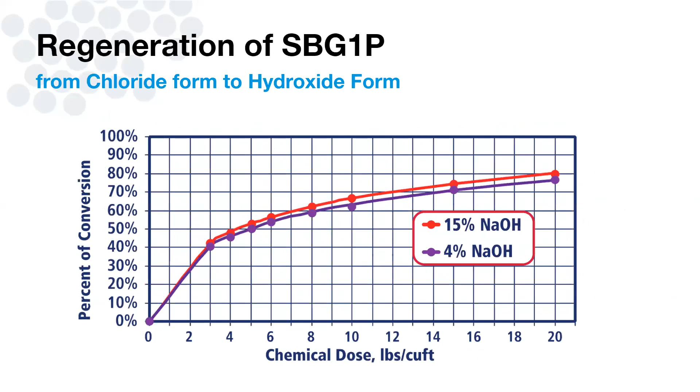All right, next question. So for during the anion regeneration, targeting 105 degrees Fahrenheit, is there a better temperature over other temperatures for that heated process?

In terms of what's the minimum, I think 110 to 120 is kind of your goal, because you're getting the most benefit. Plus, when you think about the heat, our skin tends to scald and burn at 125, so I think it's good to stay under that just from a safety perspective. But anywhere 110 to 120 is more than adequate.

If you get the water too hot, once you start getting to 140 degrees and above, what actually happens is that the anion functional groups literally come off the resin. The technical term is called cleaving. What ends up happening is it just pops right off the backbone, and it's gone forever. So we get that question a lot as well with hot water, like, hey, I need a hot water mixed bed, what do you got?

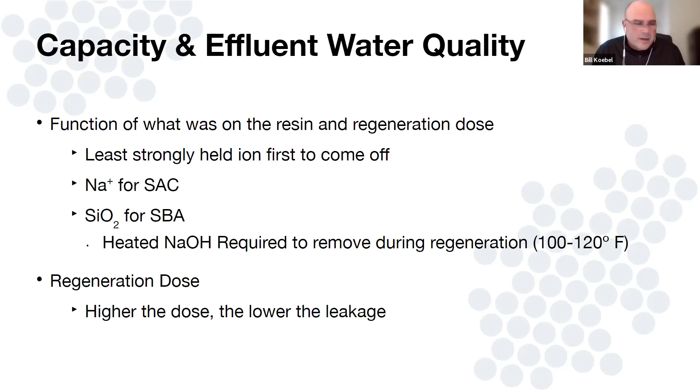So, how would I minimize TOC throw from a regenerated mix bed? That's a very good question.

Minimizing throw: there are two ways to think about this. One, resin's in a constant state of degradation, which is where the TOC comes from, especially as the resin ages. When the resin's new, it's a bit different of an animal.

You've got not only the degradation portion, but also what I call the leftovers from production itself. If you're buying a resin from us that already has a pedigree, we've taken care of most of that for you already. So most of the time in a regen scenario, you're just dealing with degradation over time. I don't really think you can manage that per se, because it just is what it is.

Where you really have to manage TOC throw off a resin is how you treat it on the back end. It's actually weird—newer resins will throw more TOC at the beginning because of the leftovers. But after maybe half a dozen regens, all that is out of the way by then. It really comes back to just what the resin's aging at the time.